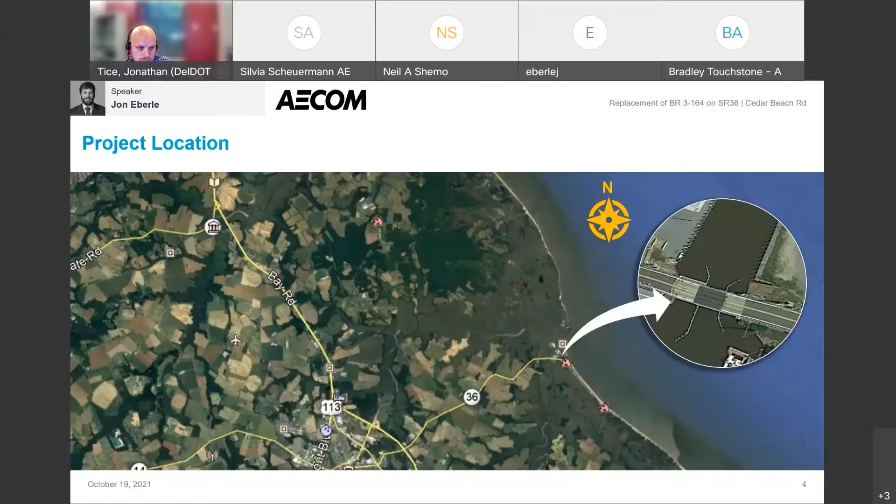So first up, I'll be introducing the project and describing the project need and goals. This project is located at the outskirts of the town of Slaughter Beach. As you can see in the map view here, the existing bridge is comprised of a swing bridge, which is the movable bridge that rotates in plan view, as well as a short approach span on the east side of the structure. And the bridge crosses the Cedar Creek, as we can see here.

The need for this project is centered around a few key points. The first of which being that heavy mariner traffic in the area makes this one of the most frequently operated of DelDOT's movable bridge inventory. This means that the new bridge is going to need to be a movable bridge as well. Next, the existing bridge is showing signs of deterioration and really has passed its useful service life and needs to be replaced.

And lastly, increasing frequency of high water events in the area due to high tides and storm events is leading to the equipment for the structure being submerged. Being a swing bridge, the existing structure has its mechanical components that operate the bridge below the bridge. And these high water events are causing that equipment to become submerged, which leads to ongoing maintenance concerns. We're trying to eliminate that moving forward.

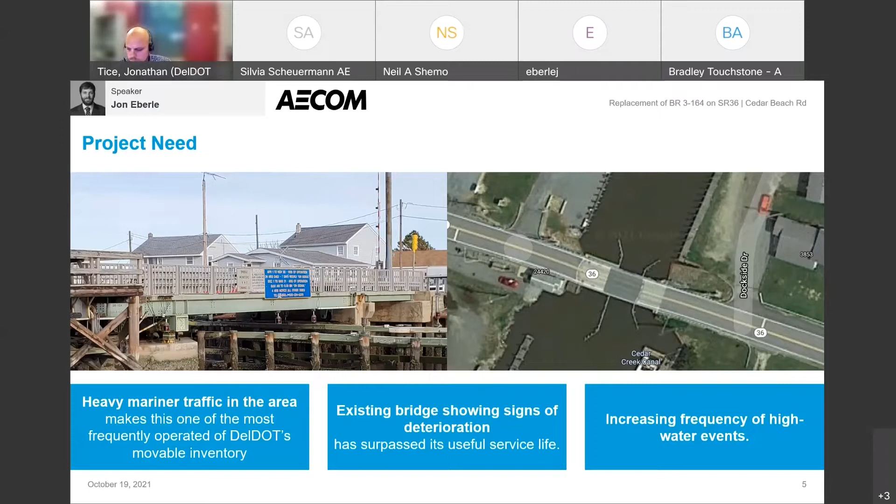Next, I'd like to go over some of the project objectives as well as the project cost. The first objective for this project is to provide operating components above the flood elevation. So as I mentioned, with the existing bridge, flooding of those mechanical components below the deck is a main issue leading to maintenance concerns. We want to make sure that that's not occurring with the new bridge. Next, we want to make sure that we're providing an aesthetically appealing structure, something that will really be a landmark in the area. And also tied to that is providing an operator's house that fits in well with the maritime setting and helps to complement the bridge itself.

The new bridge is going to have a 75-year design life, so it's really going to last into the future and be here for generations. Again, reinforcing that point that we want to provide something that's going to be a landmark in the area. And the anticipated construction cost for this project is around $27 million. So with that, I'm going to go ahead and turn things over to Rodney, who's going to talk to you about the design of the new bridge.

Thank you, Jon. I'd like to provide a brief overview of the steps that our design team went through as part of the evaluation and selection of the movable bridge type for this replacement project. Jon had mentioned two of the project goals were to maintain the current roadway profile on the approaches and to keep the mechanical and electrical equipment as high as possible above the water lines. These two factors had a big influence on the bridge type and required that the bridge have a shallow superstructure, and that the machinery and control systems also be located above the superstructure. This could be done with a vertical lift bridge and some styles of bascule bridges. The team determined that a Dutch-style bascule bridge offered a cost-effective way of meeting these goals.

The Dutch-style bridge is more commonly used for pedestrian bridges in Europe, and it provides a simple and effective way to span small water crossings and canals. This project will be the first application of a Dutch-style bridge for vehicular use in the United States.

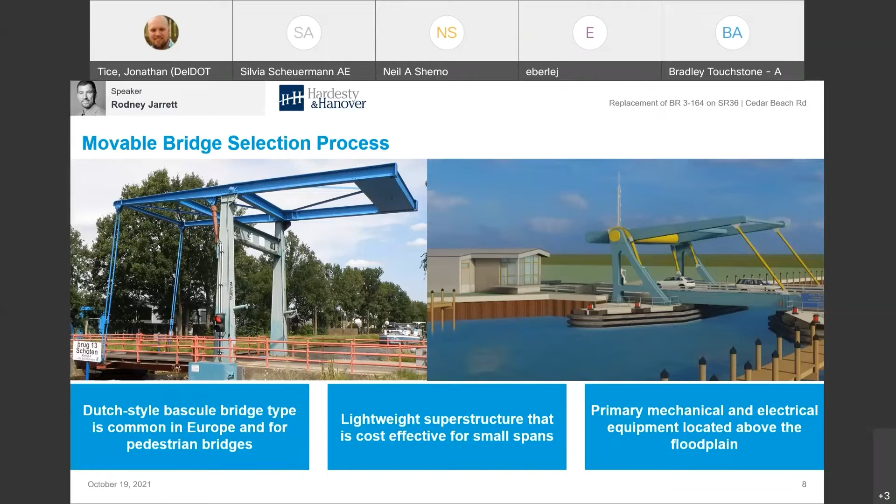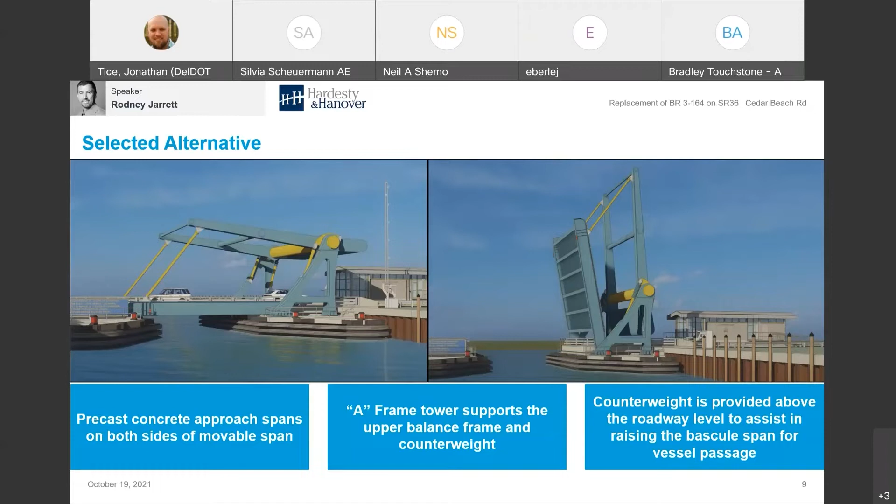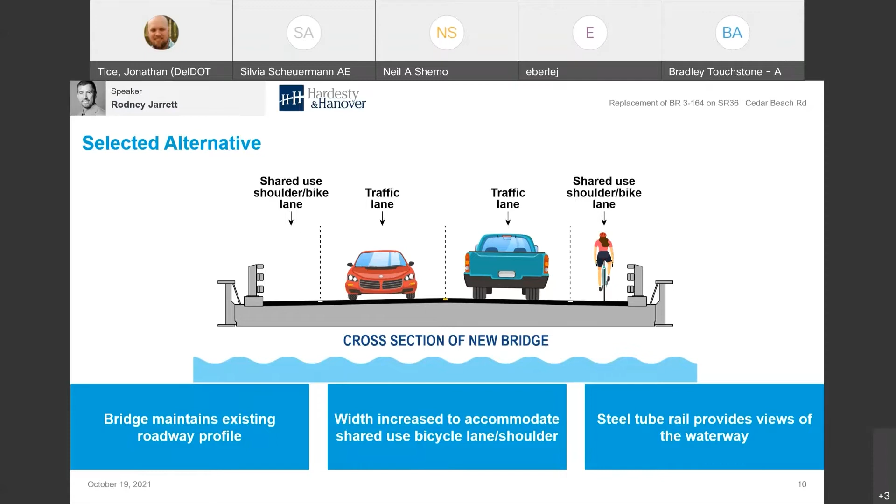So next, I'd like to talk about the architecture a little bit and walk through a few slides showing some of the renderings of the new bridge. So as Rodney mentioned, the inspiration for this bridge came from these Dutch-style bascules that are found over in Europe. It really provides a sleek and aesthetically appealing structure at this location.

And then it's kind of transferring into the waterway with the end of the house towards the waterway being surrounded entirely of glass, which really provides kind of the top of that lighthouse, which will form a navigational beacon, not only for travelers from the road, but also the vessels traveling through from the water.

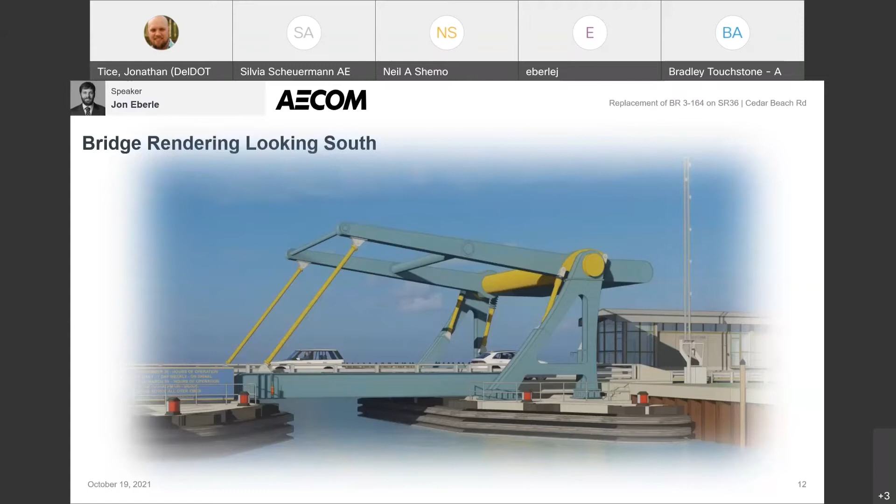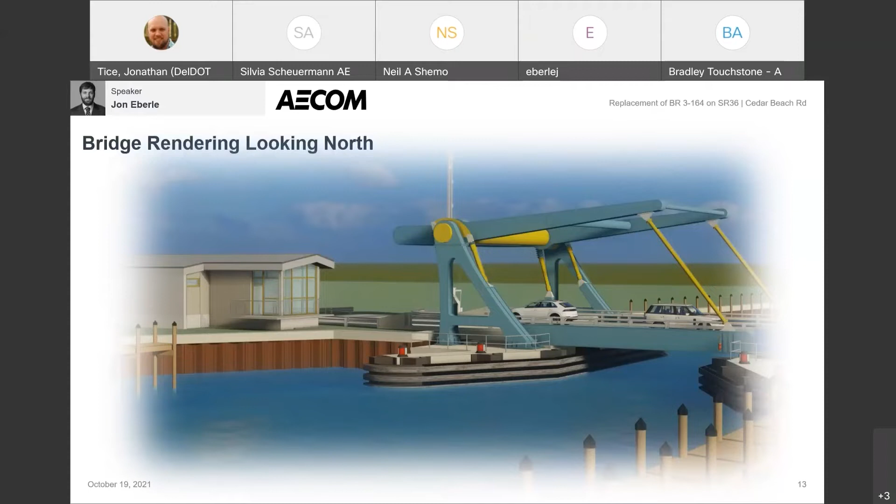And the colors of the operator's house will be selected to kind of make it a little bit more muted. So although it's an aesthetically appealing structure that ties in well with the area, we don't want it to detract from the bridge itself, which would really be the focal point of this project.

So here we see a rendering looking east along Route 36. So this is what we expect to see if we're traveling along the roadway. You can see that there will be those components of the bridge above the roadway that you'll travel under. What we're seeing here is the backside of the concrete counterweight, but there will also be some other components farther on in the bridge that you'll travel under as well.

And then we also have here the operator's house that we can see that incorporates items such as clerestory windows along the top to help let natural light in. This structure, we are trying to make sure that we're incorporating sustainable design elements into it, such as those clerestory windows that'll provide natural light, but there's also an overhang on the roof line that helps to shade it during summer months so that it doesn't create excess heat in the house.

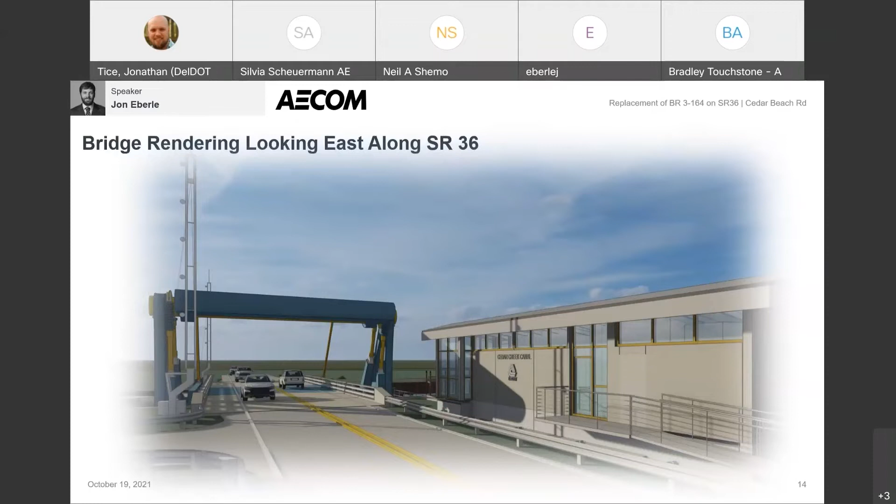And here we have a rendering of the bridge in the open position looking south, just to give you an idea of what the bridge is going to look like when it's in that open position. So you can see that both the bascule span with the roadway as well as that upper link arm move into a near vertical position to provide the opening for the waterway traffic to pass through.

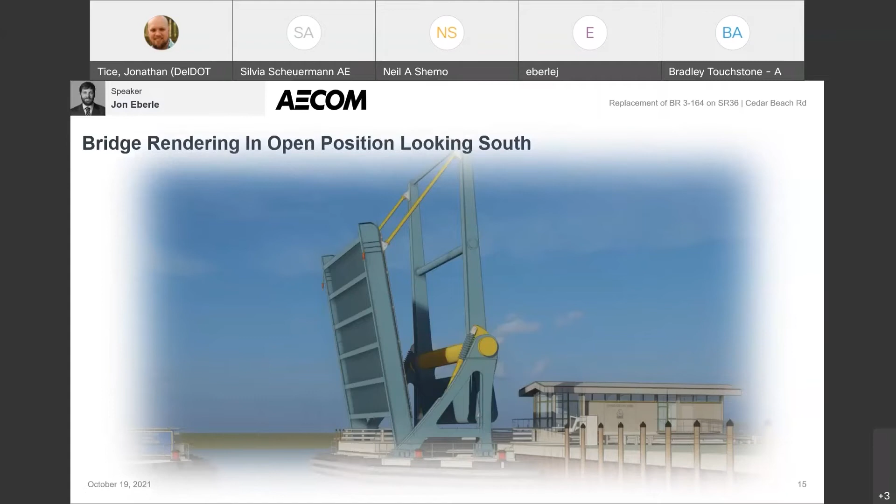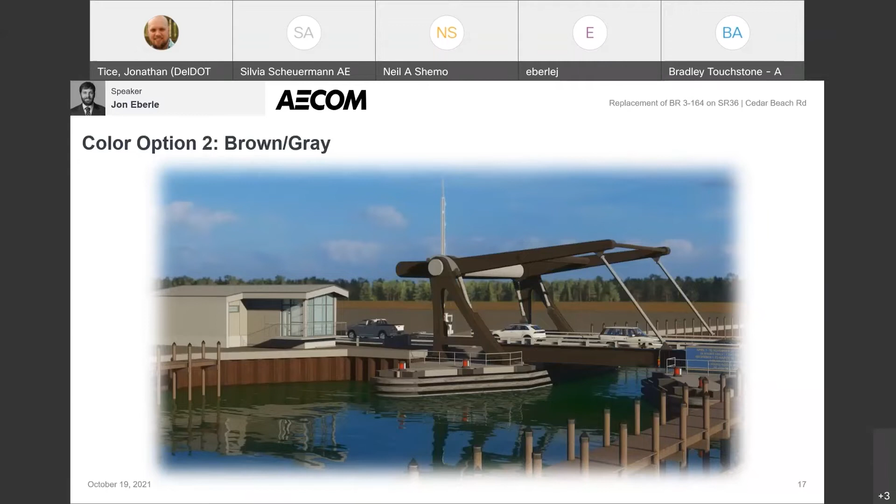The second color option that we see here is brown for the primary components, including the span, the A-frame, and the link arm, complemented with gray for those secondary components, the forward link, hydraulic cylinders, and some of those other smaller components. And then the last color option here is a teal and yellow combination. So the teal would be the primary color for the components, complemented by a light yellow color for those secondary components, the forward link arm, hydraulic cylinders, etc.

So those are the three color options. And again, DelDOT will be looking to get feedback from the public on these options, which can be submitted through the form available on the project website, which we'll provide at the end of the presentation here.

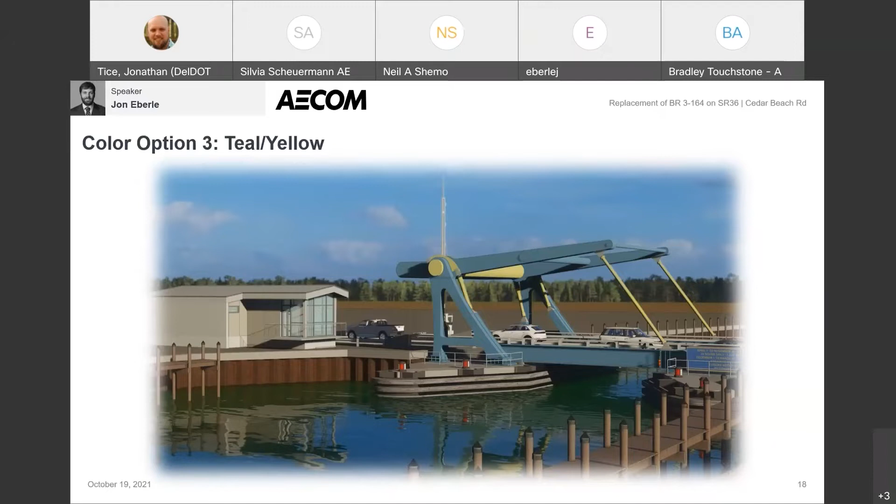So next we wanted to get into the impacts to the public. We'll break this down based on the different modes of transportation, so vehicles, boat, etc., just to give you an idea of what the potential impacts due to this project will be. So next we wanted to go ahead and walk through a rough sequence of construction just to give you an idea of what's going to take place for this project to be completed.

So the next thing will be to go ahead and demolish the existing span. This could be done a number of ways. It could be rotated in the open position, as I just showed there, to demolish in pieces, or they might float it out in larger chunks from the closed position. But regardless, this will have to be coordinated with the Coast Guard, any requirements for closure of the waterway for that to take place. So they'll go ahead and remove the existing bridge, as well as the existing operator's house, and that includes the foundations for both as well.

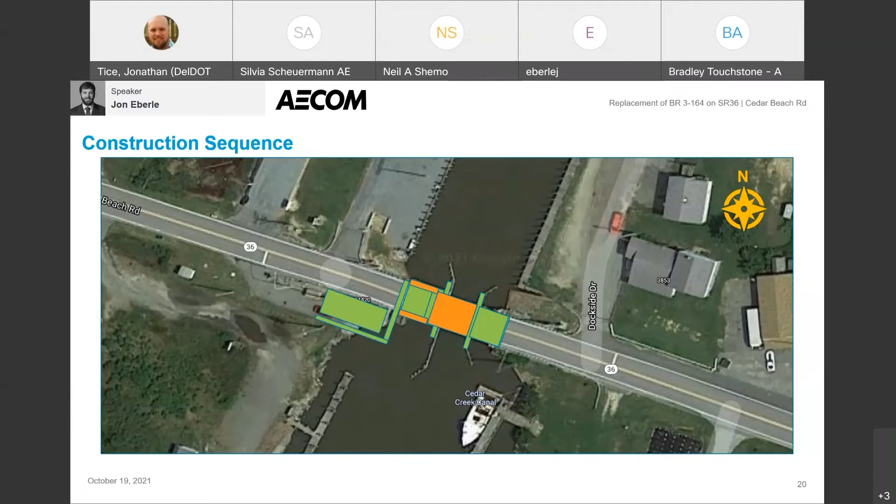So using that construction sequence as a starting point, there's probably some questions of what are the impacts going to be to the public throughout the construction. So we broke this down into a couple different categories. The first one here being impacts to mariners. So there will be temporary closures of the channel throughout construction. This will be for things such as when they're demolishing the existing bridge, when they're driving piles for the new bridge or floating in major pieces. We will be trying to maintain access via boats as much as possible, but there will be some required closures that'll have to be coordinated.

Additionally, there's going to be work barges used for the project, like I showed in the previous slide. This could be barges for equipment, but also floating in materials. So there could be a number of barges working in the area that might limit the width of the waterway there. So the clearances for the new bridge, I should say, will be either increased or maintained at the existing. So the horizontal clearance as well as the vertical, it won't be getting any smaller. If anything, those will be increasing.

Also note here that there's going to be some potential restrictions to dock access. So this is primarily related to those work barges. As they're moving around with equipment and materials, they might have to block some of the access to some of these docks in the area. And then lastly here noting that the contractor is going to be ultimately responsible for coordination and compliance with all U.S. Coast Guard rules.

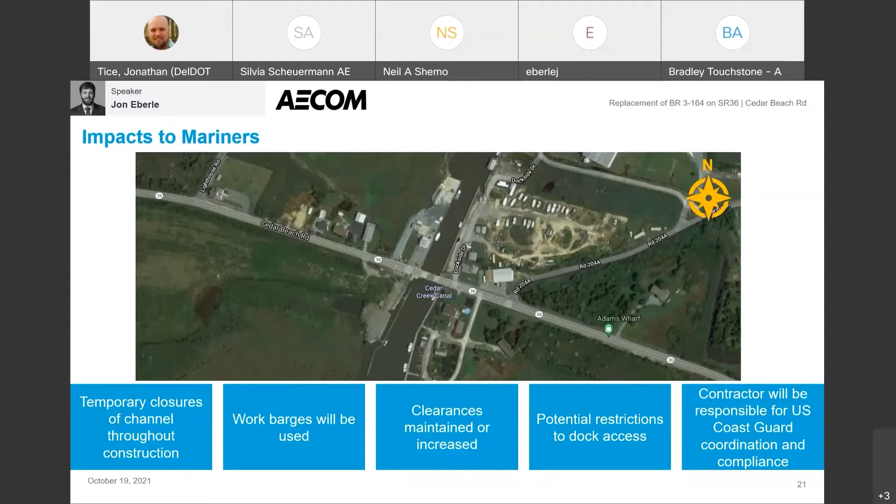All right, so next I'm going to talk about impacts to right-of-way around the bridge. So first up, the boat launch to the north of the structure will likely be impacted. The contractor might be using that to bring in equipment and material. So from time to time, they'll be using that boat launch to load things onto the barges and float them down to the structure. And then also docks and the waterfront areas around the bridge. Again, they'll be using these work barges for the equipment and materials that might block access to some of these docks and waterfront areas.

Also, I wanted to mention that access to the adjacent property owners will be maintained throughout construction. So nobody's driveway is going to be blocked for the construction efforts. Those will all be maintained throughout construction. There will be some temporary and/or permanent utility relocations for this project. One example is an overhead wire to the south of the existing bridge. That'll have to be relocated because one of the poles conflicts with the location of the new operator's house. So relocation will be required there for one example.

There will be some new right-of-way required for the new operator's house. So on the southwest side of the bridge, kind of where the existing operator's house is, the new operator's house will be in the same vicinity, but it's going to be a little bit larger. So there will be some right-of-way required to construct that.

And then there's also going to be some impacts to construct traffic control devices. So there will be some stop gates right adjacent to the bridge that'll be constructed, as well as some warning gates and lights a little bit farther back, a few hundred feet back the roadway. So there will be some construction impacts to construct those elements.

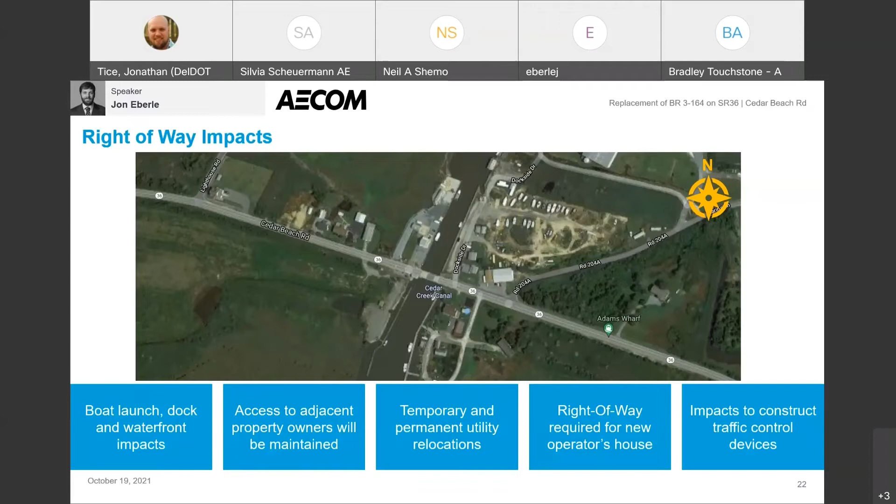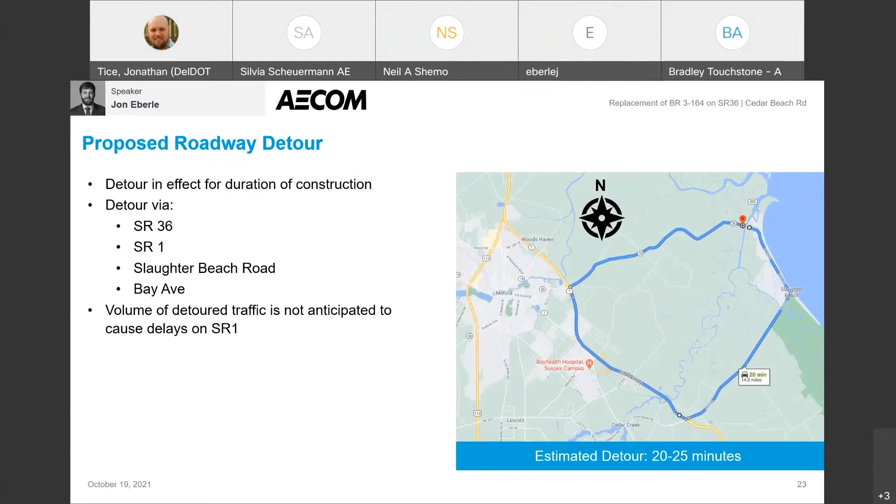So as we said earlier, the new bridge is going to incorporate a shoulder shared use with bicycles, so it'll actually improve access for bicyclists crossing the structure and improve safety. But throughout construction, again, the bridge is going to be closed, and therefore there will be a detour required for bicyclists. This detour will be very similar to the vehicular detour we just talked about, with the one main exception being that SR1 won't be used, so some other roadways will be utilized there. And this detour will be signed for bicyclists.

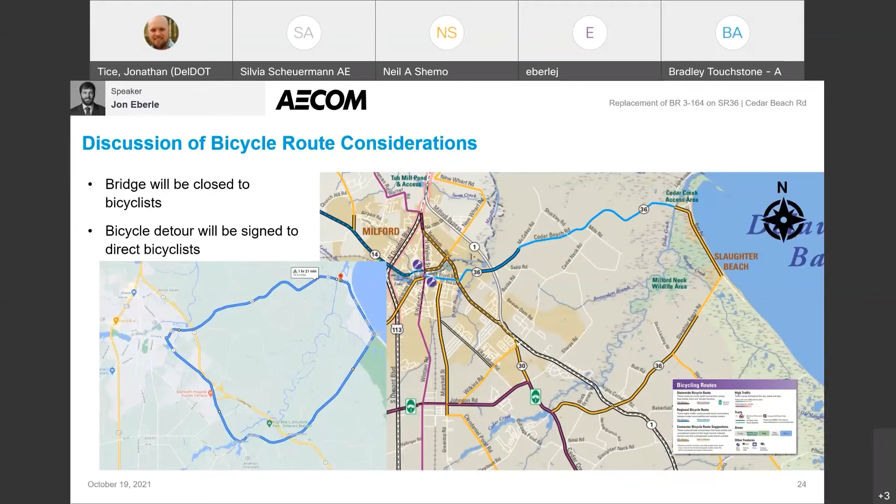So lastly, we wanted to mention impacts to your emergency vehicles, public transportation, and school buses. This will primarily be related to coordination with these entities to let them know about the project, when the roadway is anticipated to be closed, and making them aware of what the detour routes are so they can plan accordingly. So this will include emergency vehicles, both the Memorial Fire Department, as well as the Delaware Emergency Management Agency.

For public transportation, there are no DART routes currently accessing these roadways, but there will be coordination with DART for paratransit access. And then lastly, for the schools, there will be coordination with the Milford School District.